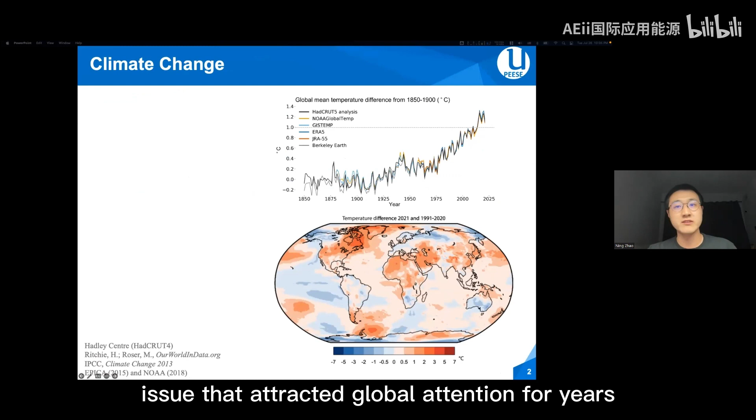Climate change has become a critical issue that attracted global attention for years. In fact, the past decade was the hottest on record, and this is the latest sign of global warming on the planet. Globally, 2021 ranks the 5th on the list of hottest years on record, warmer than 2015 and 2018. And the annual average temperature rise of 2021 set at 1.1 to 1.2 degrees C above the pre-industrial levels of the 20th century.

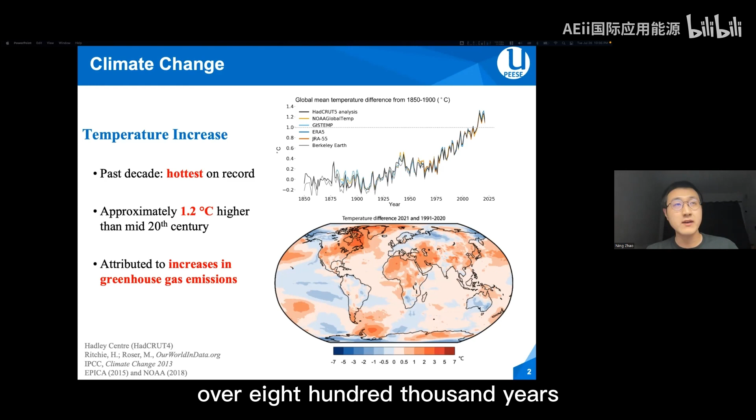And this is caused in large part by emissions of carbon dioxide and other heat-trapping gases from the burning of fossil fuel. And the CO2 concentration in the atmosphere is currently at the highest levels for over 800,000 years. So the global energy-related carbon dioxide emission increased from 2 gigaton per year in 1900 to 36.3 gigaton per year in 2021, which is the highest level for annual greenhouse gas emissions.

To enforce the global response to the threat of climate change, the United Nations has reached the Paris Agreement. It aims to keep a temperature rise in this century below 2 degrees C above pre-industrial levels, and to pursue efforts to limit the temperature increase even further to 1.5 degrees C. However, given that temperature in 2020 was already 1.2 degrees C higher than pre-industrial levels, one can say that this world is far from meeting these targets.

In this figure, we can further look at the challenges in front of us from a prediction perspective. The potential greenhouse gas emissions and the predicted temperature rise under uncertainty are presented for this century. A key feature in this figure is that the uncertainty can considerably influence both the greenhouse gas emissions and the temperature rises. So it is important to consider the uncertainties while planning for the future.

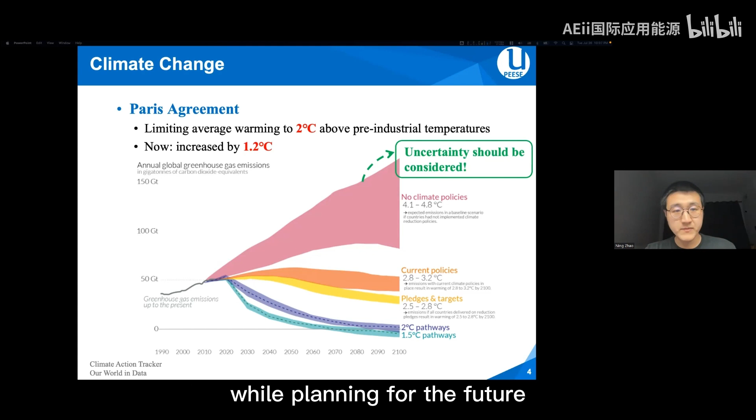In terms of the different cases, we can find that with no climate policies, the emissions are likely to skyrocket to over 100 gigatons by the end of this century, and the temperature could rise by 4 to 5 degrees C. On the other hand, involving some climate policy could lead to a temperature rise of 2 to 3 degrees C, and lower levels of emission compared to current status. If the world aims at achieving the 2 degree C long-term temperature target within the 21st century, zero emissions or complete decarbonization seems to be a promising and inevitable approach.

Therefore, effective and bold action is needed if the world intends to achieve these targets proposed by the Paris Agreement. The decarbonization policies from administrations are especially needed. To this end, New York State has the ambition to combat climate change. It has passed a sweeping climate plan in July 2019. It's called the Climate Leadership and Community Protection Act.

So several ambitious and major targets of the CLCPA include producing 70% of electricity from renewable sources by 2030, reducing 100% of the electricity sector's greenhouse gas emission by 2040, and eventually achieving net zero emissions in all sectors of the economy by 2050, which is 30 years from now. President Biden also announced ambitious climate targets for the power sector, such as achieving an emission-free power sector by 2035, installing millions of new solar panels and tens of thousands of wind turbines, etc.

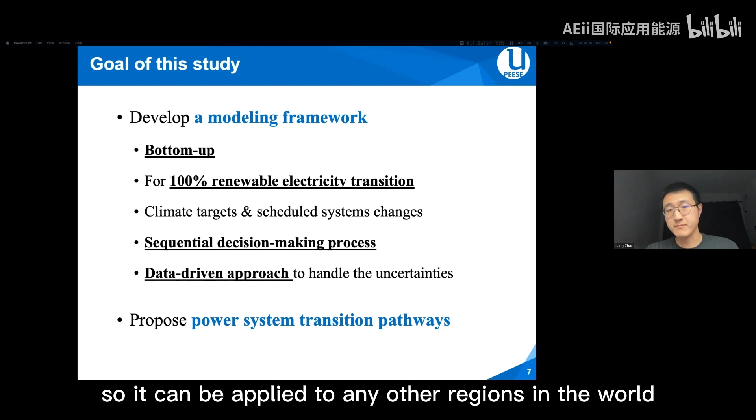There are two main goals of this study. The first is to develop a bottom-up modeling framework for 100% renewable electricity transition that accommodates climate targets, scheduled system changes, as well as the sequential decision-making process. The framework should be capable of integrating machine learning-based data-driven approaches to handle the system's uncertainties. And the framework should also be general enough so it can be applied to any other regions in the world.

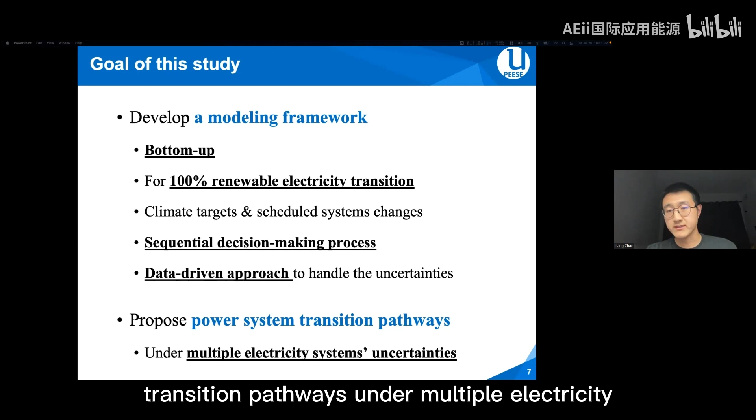The second goal is to propose the potential power systems renewable transition pathways under multiple electricity systems uncertainties. And the network framework figure here represents the power systems for this study. It shows electricity flows and emissions of the power sector. The system is supposed to meet the electricity generation demands on an annual basis.

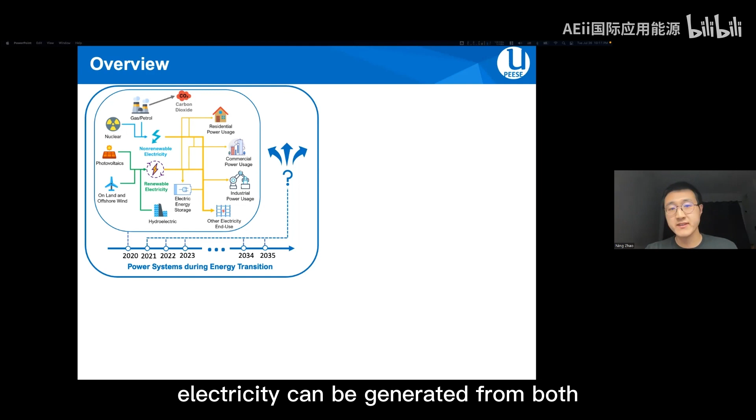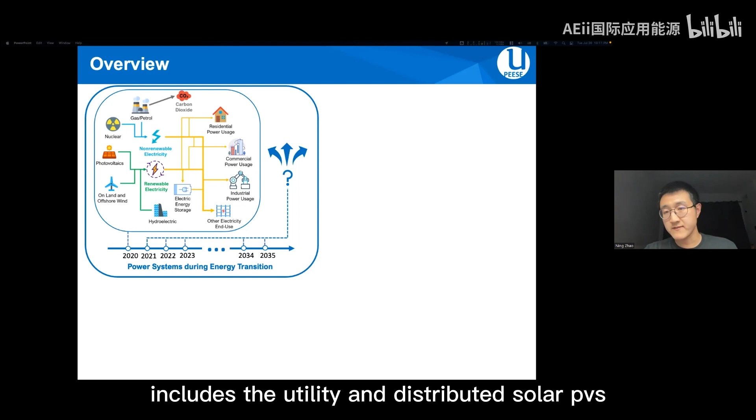In terms of power generation, electricity can be generated from both renewable and non-renewable technologies. Renewable sources include hydro, solar, and wind, and solar power includes the utility and distributed solar PVs. Wind power can be categorized into on-land and offshore wind. Non-renewable energy sources include fossil and nuclear.

So the power systems model is formulated in a bottom-up manner that characterizes each power generation facility by its generation technology and its age. And this can be more appropriate for integrating the energy transition process, which is directly related to the active technologies and facilities.

The electricity is produced and transmitted to be used for multiple end uses, including residential, commercial, industrial, and other power end uses. A proportion of electricity may be stored before its usage. This is necessary for the stability of the grid, since a lot of electricity would be generated from intermittent sources such as wind and solar.

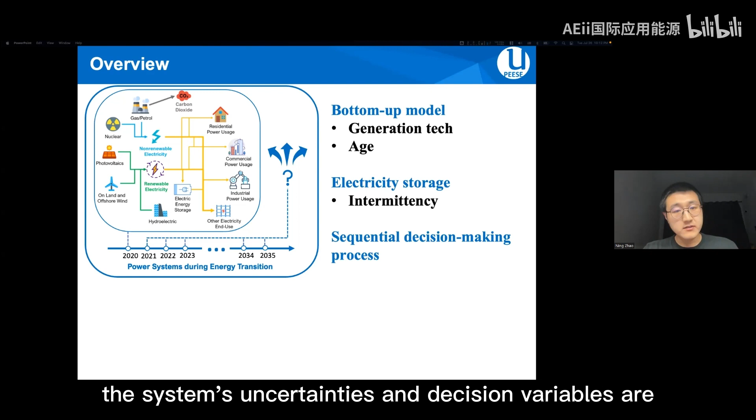The system's uncertainties and decision variables are realized and determined on an annual basis, which reflects the sequential decision-making process. The figure on the bottom left shows the uncertainty data samples in one time period, considering that we have 15 time periods across the planning horizon. The power systems uncertainties in this study include the electricity generation demand, the market availability of wind turbines, and the market availability of solar PVs.

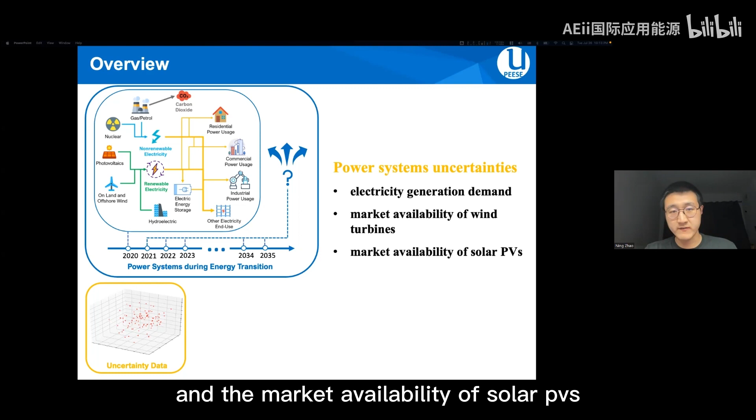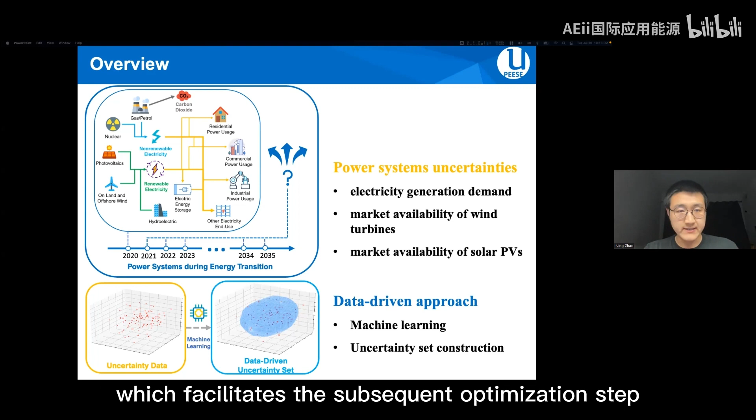Based on the uncertainty data, machine learning techniques are used to construct the data-driven uncertainty sets, which facilitates the subsequent optimization step. The machine learning techniques applied in this study include a variational inference algorithm for Dirichlet process mixture model, DPMM, principal component analysis, and kernel density estimation.

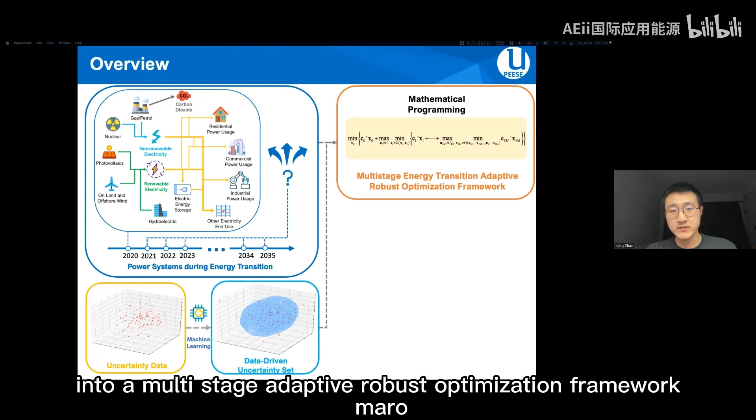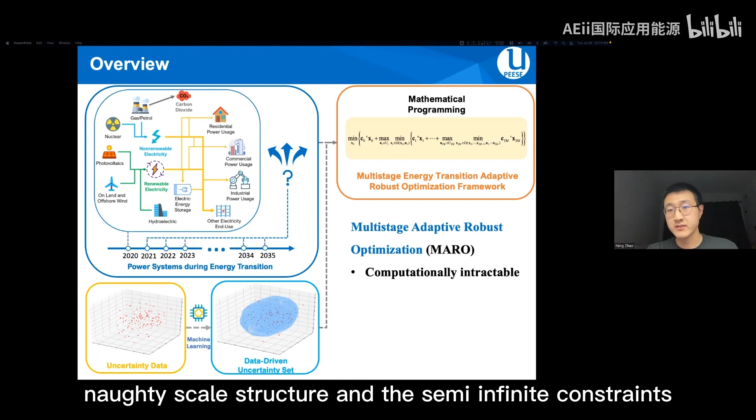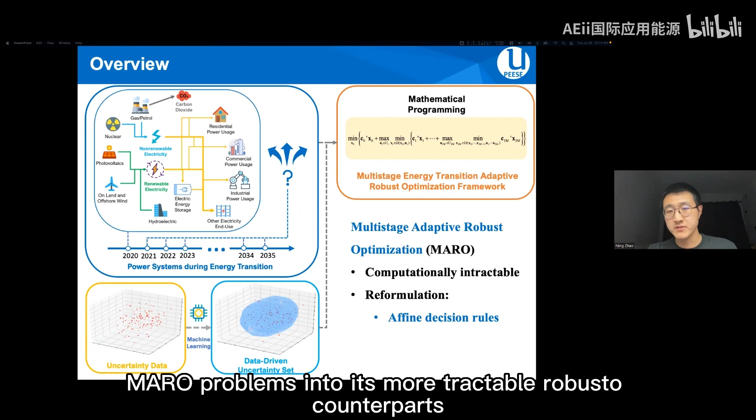Given the power systems formulation and the uncertainty set structure, the renewable power systems transition under uncertainty can be formulated into a multi-stage adaptive robust optimization framework, MARO. Note that the MARO problems are computationally intractable because of their multi-stage structure and the semi-infinite constraints. Therefore, affine decision rules are applied to reformulate the MARO problems into their more tractable robust counterparts.

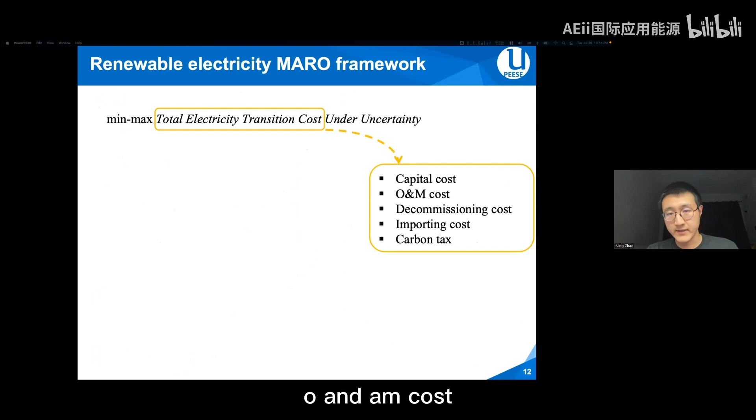After computational optimization, we could have the potential renewable electricity transition pathways under uncertainty, such as annual electricity generation from different energy sources and technologies. This is the structure of the MARO power systems renewable transition framework proposed in this study. The objective function is to minimize the total electricity transition cost under uncertainty. The total electricity transition cost consists of capital cost, O&M cost, decommissioning cost, importing cost, and also carbon tax.

The uncertainties, as mentioned previously, include the electricity generation demand, the market availability of wind turbines, and market availability of solar PVs. The min-max here in the objective function is a simplification of the original multi-level optimization structure. And here we can find X and U represent the decision variables and the uncertainties in each time period respectively.

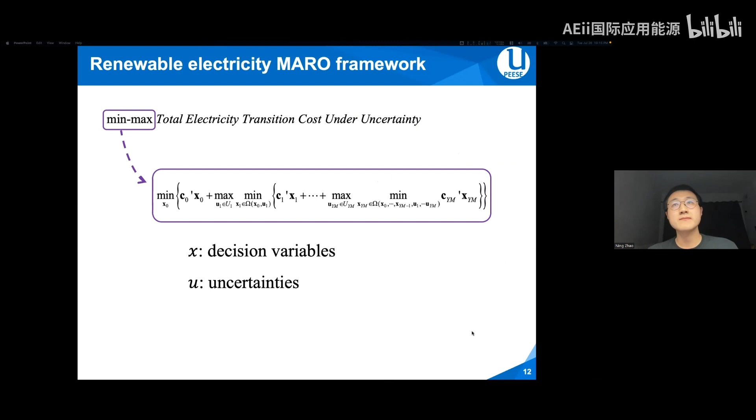The objective function is subject to multiple types of constraints. For instance, the renewable electricity generation and emission targets constraints represent the technological and climate targets, including net zero emission targets, renewable electricity percentage target, carbon-free electricity targets, emissions target, and also renewable generation technology deployment targets for intermittent renewable sources and also energy storage.

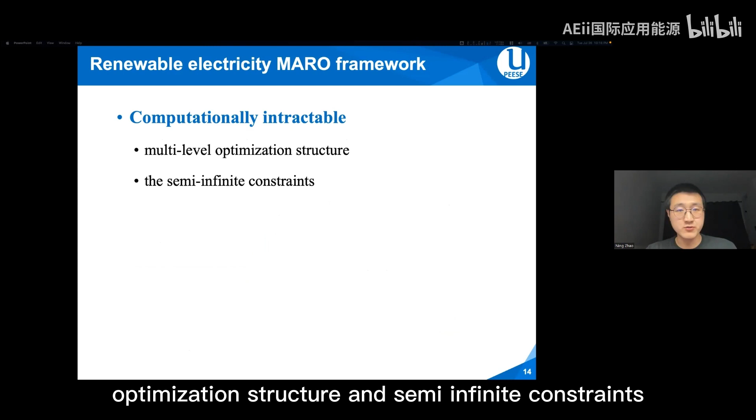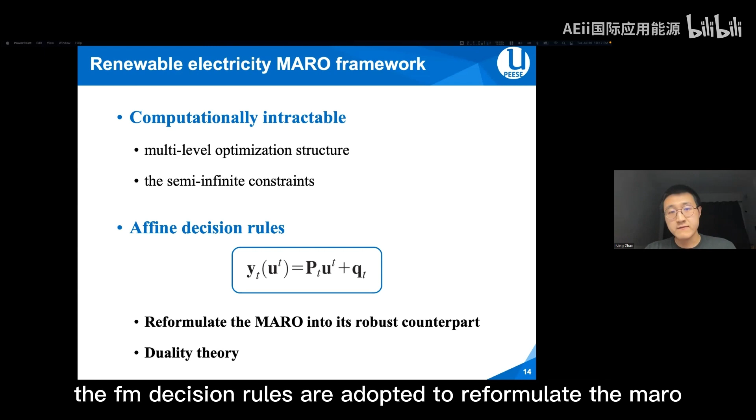The proposed renewable electricity transition MARO is computationally intractable owing to its multi-level optimization structure and semi-infinite constraints. And semi-infinite here means that we have a finite number of variables and an infinite number of constraints because of the constraints defined by the uncertainty sets. Therefore, the affine decision rules are adopted to reformulate the MARO into its tractable robust counterpart based on duality theory.

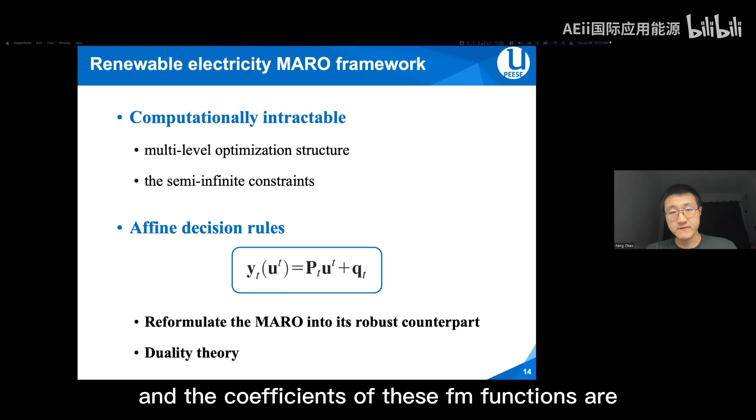Specifically, the affine decision rule replaces the wait-and-see decision variables by the affine functions of these uncertainty realizations. And the coefficients of these affine functions are introduced as new variables, as shown here.

To illustrate the applicability of the proposed electricity transition framework, a case study on the 100% renewable power systems transition of New York State under uncertainty is investigated. The main climate targets include the 70% renewable electricity generation by 2030 proposed by the New York State CLCPA, and achieving an emission-free power sector by 2035, according to the National Climate Plan of President Biden. And the technology deployment targets for renewable generation and electricity storage are also included.

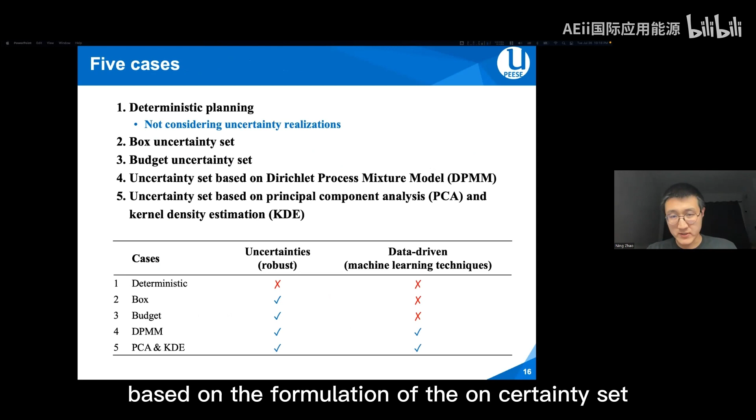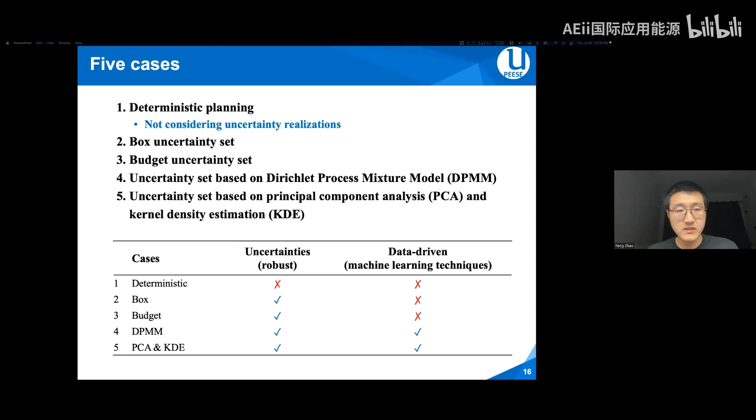5 cases are investigated based on the formulation of the uncertainty set, including deterministic planning, box uncertainty set, budget uncertainty set, data-driven uncertainty sets using variational inference algorithm for DPMM, and data-driven uncertainty sets formulated using PCA coupled with KDE. Specifically, the deterministic planning case includes no uncertainties, so its optimization results are not robust and cannot fully hedge against the worst cases during the power system's renewable transition.

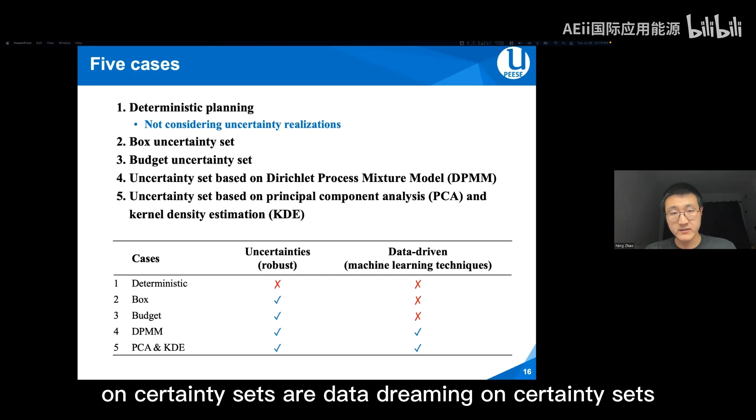And the table here shows the features of different cases in this study. The deterministic planning considers no uncertainties, and only the DPMM and PCA coupled with KDE uncertainty sets are data-driven uncertainty sets that are constructed using these machine learning techniques.

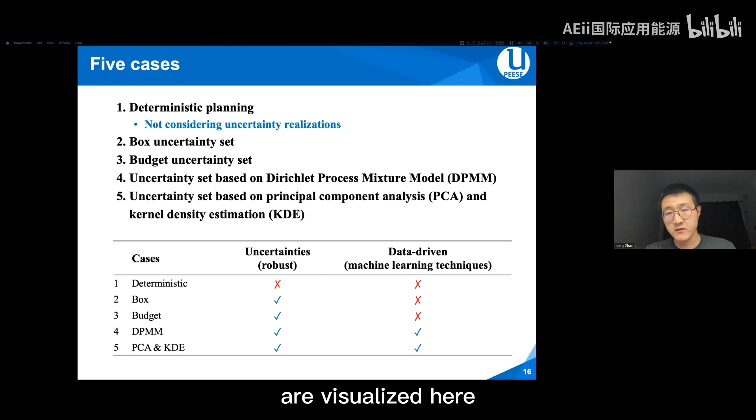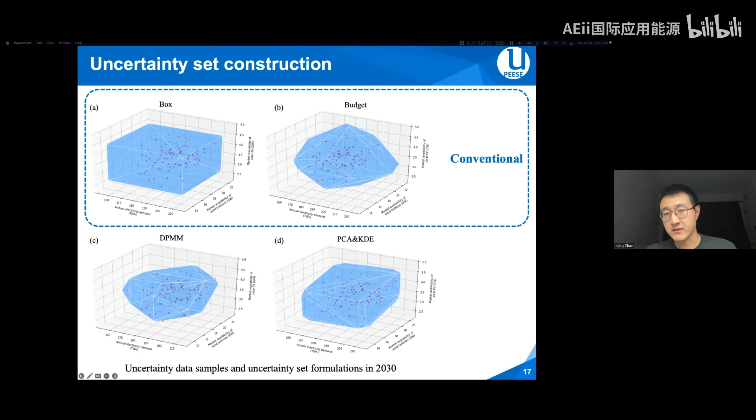4 types of uncertainty sets for the year of 2030 are visualized here. In this figure, the x-axis, y-axis, and z-axis represent the uncertainties of annual electricity demand, market availability of wind turbines, and market availability of solar PVs, respectively. The box uncertainty set and budget uncertainty set for 2030 are shown in the top 2 figures. Both types of uncertainty sets are not data-driven uncertainty sets, and all data samples are included in the box or budget uncertainty sets.

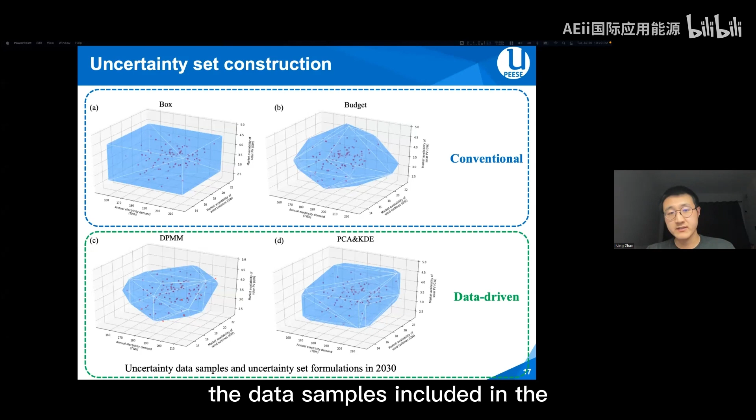On the other hand, the bottom 2 figures visualize the DPMM uncertainty set and the uncertainty set using PCA coupled with KDE for 2030. These data-driven uncertainty sets are tuned to have the same coverage level of data samples, which is 90% in this study. In this figure, the data samples included in these data-driven uncertainty sets are plotted using red dots, while the samples that are not included are represented by the red crosses.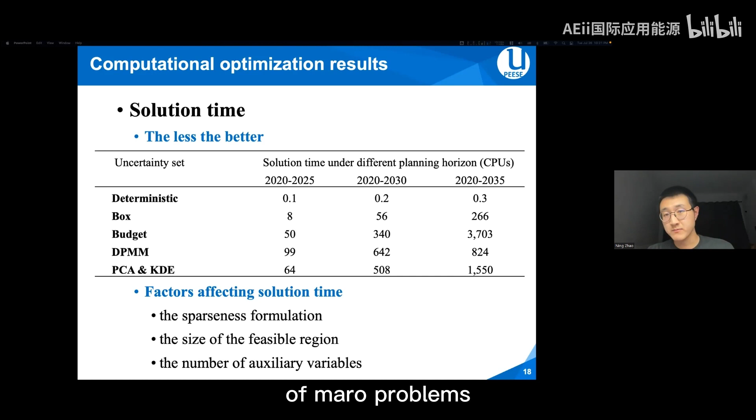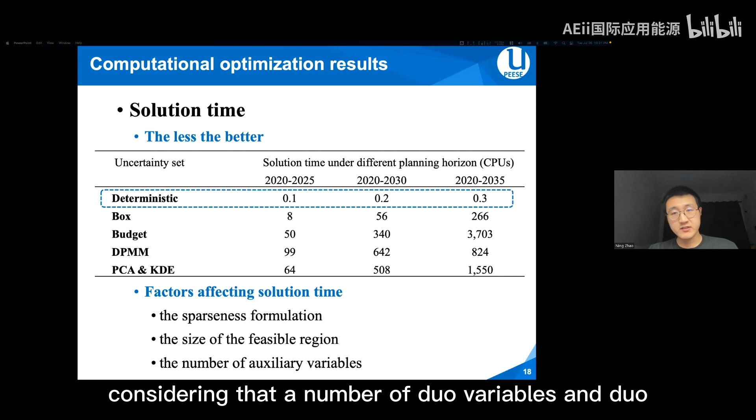Note that several factors can affect the solution time of MARO problems, including the sparseness, formulation, the size of the feasible region, and also the number of auxiliary variables. The deterministic case has the shortest solution time of less than 1 CPU second for all planning horizons, while the robust optimization cases tend to have much longer solution time. This is because the optimization problem for deterministic planning has significantly smaller problem sizes than the robust optimization cases, considering that a number of dual variables and dual problem constraints are introduced while we implement the affine decision rules for MARO.

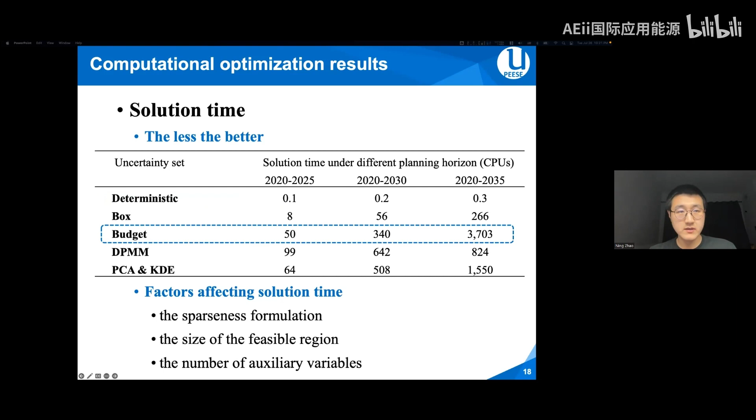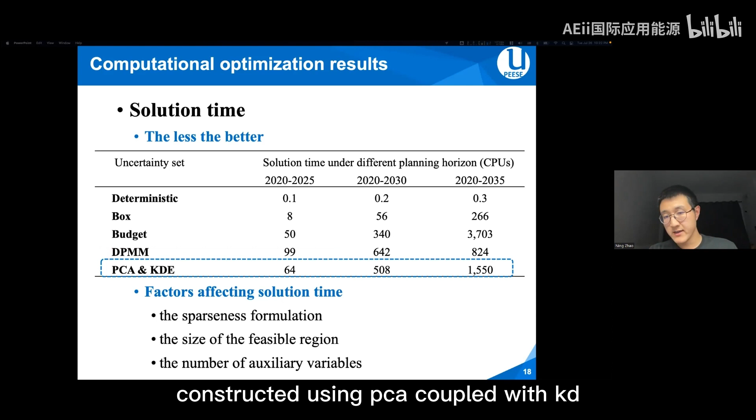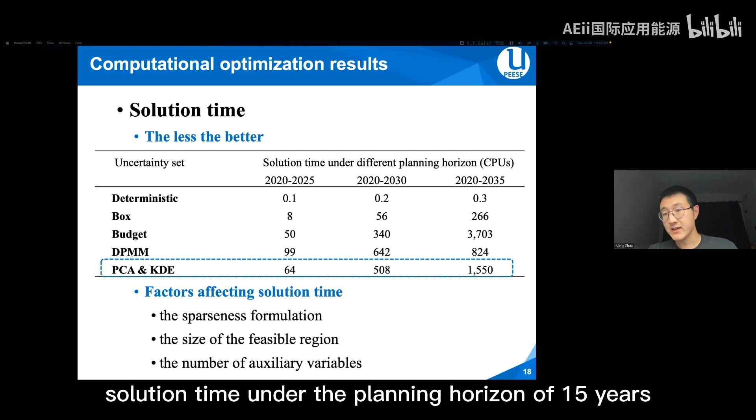Lastly, the uncertainty set constructed using PCA coupled with KDE has more auxiliary variables that may increase the solution time for even shorter planning horizons. But its sparse formulation and the relatively small uncertainty set feasible region combine to lead to less solution time under the planning horizon of 15 years compared to the budget uncertainty sets.

The optimal objective values, namely the minimum renewable electricity transition cost under uncertainty for different uncertainty sets and different planning horizons, are shown here. The deterministic planning solutions show lower electricity transition costs compared to the robust optimization results because the potential uncertainty realizations are not considered in these deterministic cases. The total system costs for the electricity transition of robust optimization solutions are 21 to 42% higher than the deterministic planning.

Considering the robust optimization cases, using data-driven uncertainty sets, including PCA coupled with KDE and DPMM, could achieve less conservative solutions compared to the conventional budget and box uncertainty sets, as shown by their relatively lower objective value. The total renewable transition cost under these data-driven uncertainty sets is 2 to 17% lower than the conventional uncertainty sets.

In addition, the data-driven MARO solution could cover 90% of the potential uncertainty realization across the planning horizon, while the solution under the deterministic scenario could only cover around 24 to 57% of the potential uncertainty realization during the transition process. Therefore, using robust optimization could effectively address energy transition uncertainties and benefit the reliability of power systems.

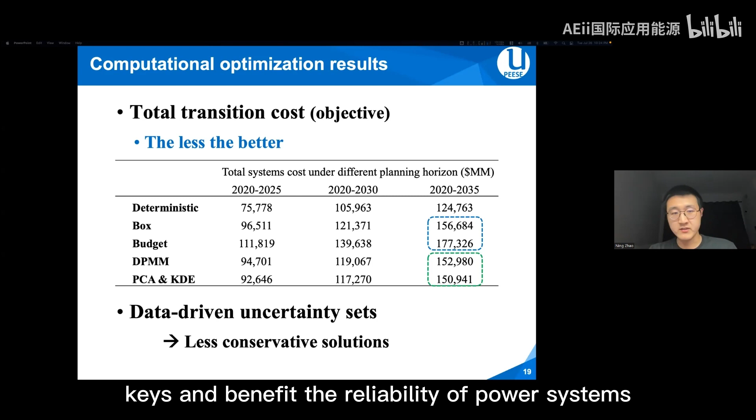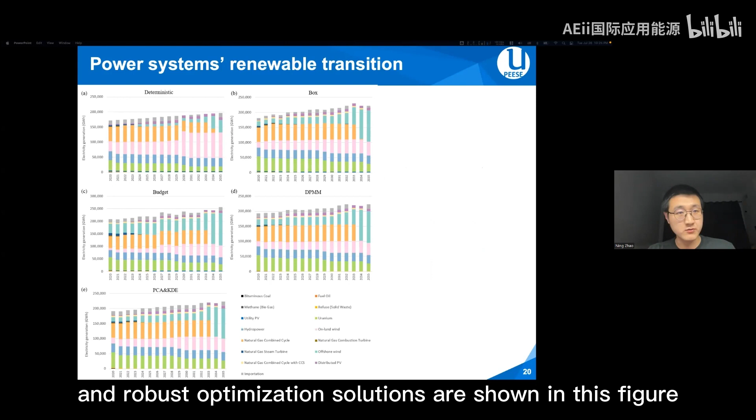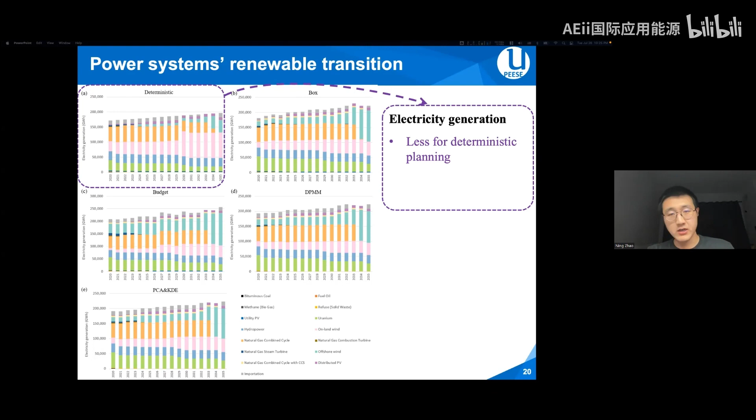The electricity generation from different sources during the transition under deterministic and robust optimization solutions are shown in this figure. We can find that the electricity generation for the deterministic solution in the first figure is much lower compared to the robust optimization solutions shown in the other four figures. This is because the case under uncertainty could compensate for any potential realization of the uncertain electricity generation demands, which could be higher than the generation demands under the deterministic case for any time periods within the planning horizon.

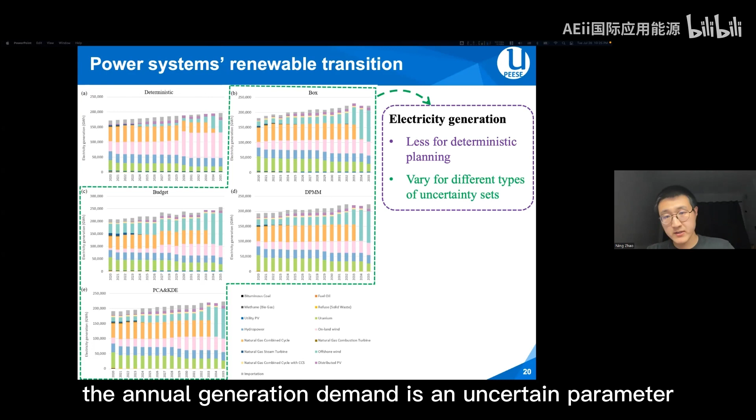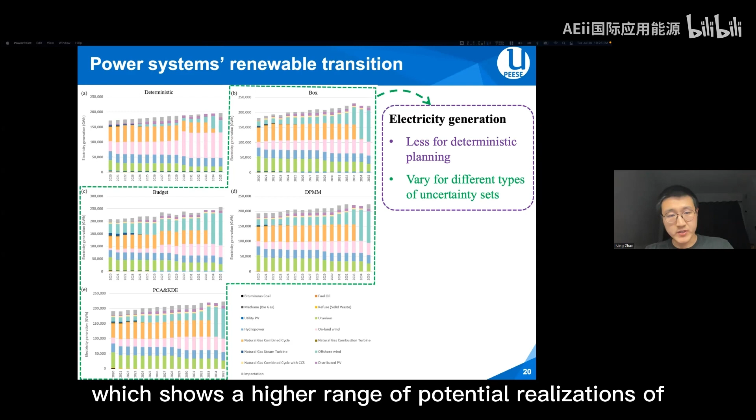Notably, the annual electricity generation within the planning horizon may vary for different types of uncertainty sets. This is because the annual generation demand is an uncertain parameter, and the ranges of its potential realization are likely to be different for different types of uncertainty sets. The electricity generation under the budget uncertainty sets tends to be much higher compared to other types of uncertainty sets. And this can be illustrated by the previous figure on the uncertainty set visualization, which shows a higher range of potential realizations of the uncertain electricity generation of the budget uncertainty sets.

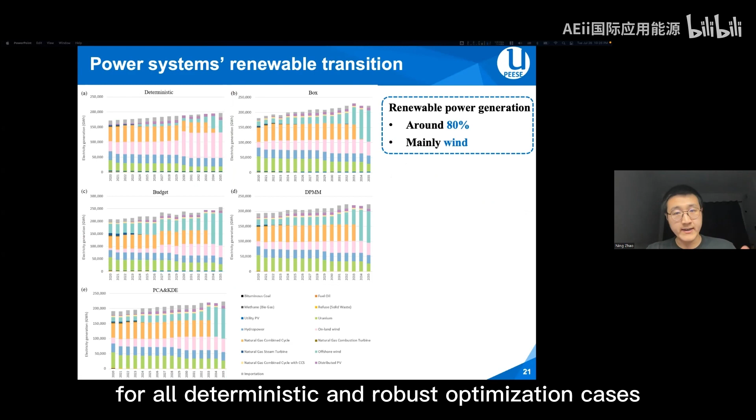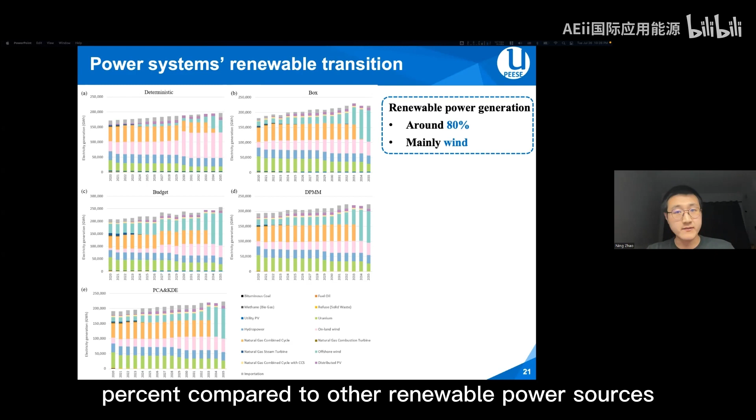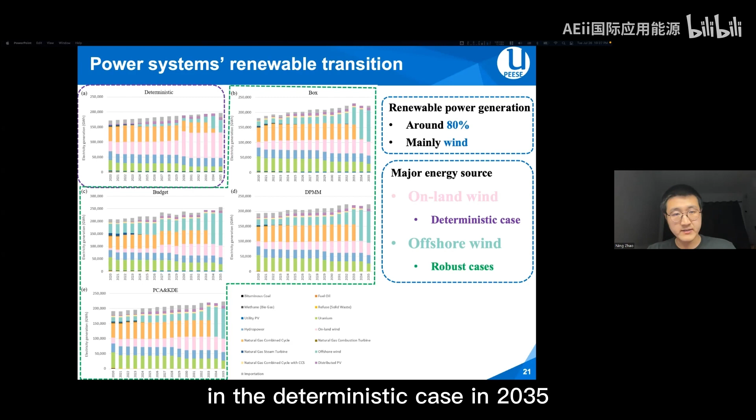In terms of renewable energy generation, renewable sources provide around 80% of total electricity generation by the end of the planning horizon, that is 2035, for all deterministic and robust optimization cases. And wind may become the major source of electricity, mainly due to the relatively high capacity factor of over 20% compared to other renewable power sources. Notably, the major energy source for power systems under deterministic and robust optimization cases are different. On-land wind may become a major source for electricity generation in the deterministic case in 2035, while offshore wind accounts for the largest proportion of electricity generation by the end of the planning horizon under the cases with uncertainty.

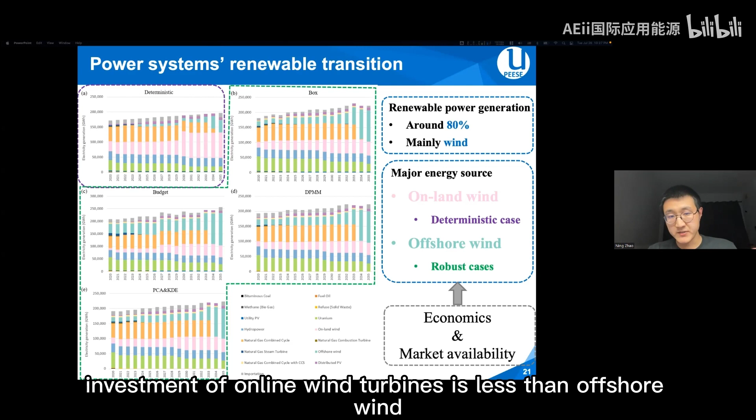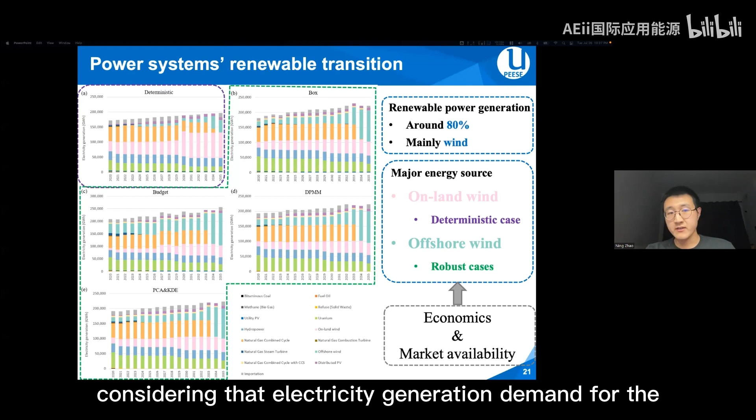The differences in the application of different types of wind energy for deterministic and robust optimization cases result from both economic and market availability reasons. Economically, the capital investment of on-land wind turbines is less than offshore wind, but on-land wind turbines would need more investment in electricity storage units for a unit amount of electricity generation. Therefore, considering that electricity generation demand for the robust optimization cases is much higher than the deterministic ones, the cost for electricity storage would significantly increase if on-land wind becomes the major renewable source in these robust optimization cases.

In terms of market availability, the offshore wind turbines have high capacity factors, so they would generate more electricity per unit amount of installed capacity compared to on-land wind. And this is particularly important considering that the market availability of wind turbines in these robust cases could be considerably less than the deterministic case, since it's an uncertain parameter. And due to these two reasons, on-land wind is selected as the main power source at the end of the planning horizon in the deterministic case, considering that this case has complete information about the annual generation demand and the much larger market availability for wind turbines.

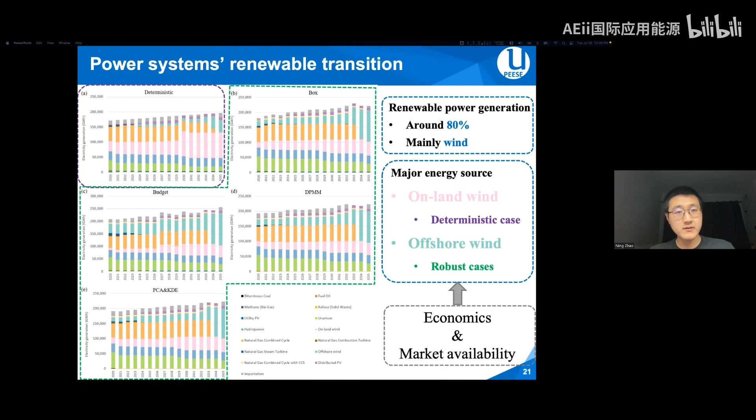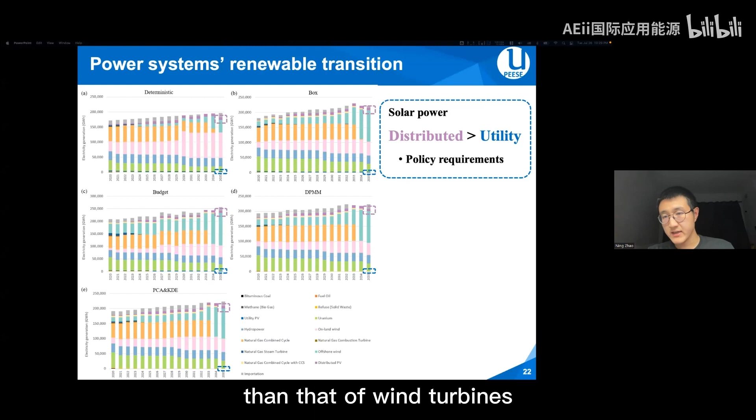As for solar, distributed solar PVs account for a large percentage of electricity generation by 2035 for all deterministic and robust optimization solutions, while utility solar PV has a much smaller market share compared to distributed solar PV under all these cases. The relatively high penetration level of distributed solar PV is probably because of the deployment requirements from the government. This requirement mandates the capacity of distributed solar PV to be higher than 6 gigawatts by 2025, and no such requirements exist for utility solar PV in New York State. On the other hand, the market availability of solar PV is much less than that of wind turbines, which suggests that it may benefit the application of solar power to increase the market availability of solar PVs through increasing importation or domestic manufacturing.

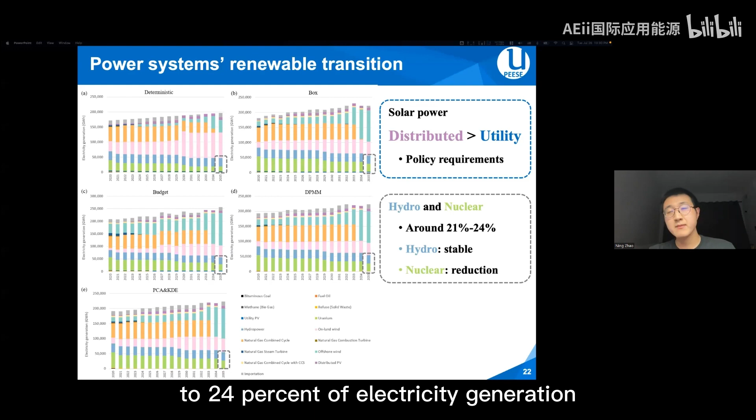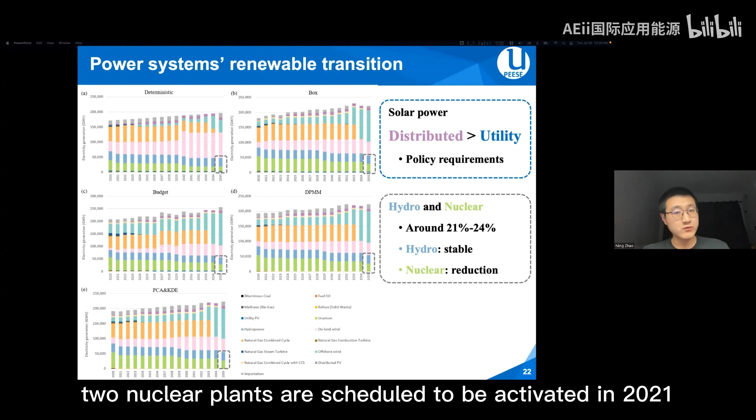Hydro and nuclear power currently provide over half of the annual power generation in the state, and they would account for around 21 to 24% of electricity generation by 2035 for all cases. The generation from hydropower is relatively stable during the transition because of its long lifetime, and the major reduction from nuclear power for all deterministic and robust optimization solutions is because of the scheduled decommissioning of large nuclear plants, and also its relatively short lifetime. For example, 2 nuclear plants are scheduled to be deactivated in 2021, and the scheduled decommissioning can be observed in this figure for all solutions.

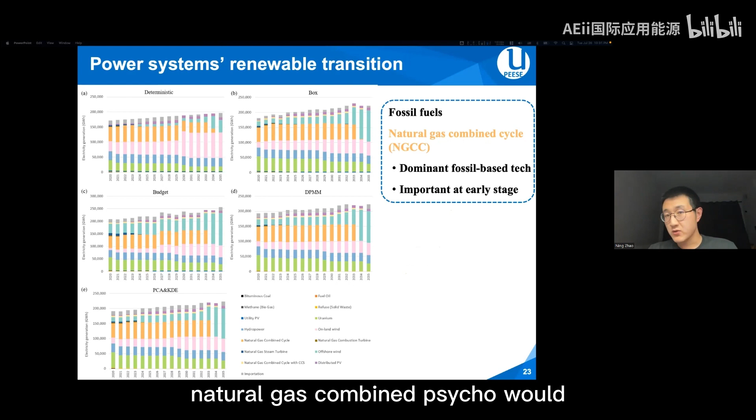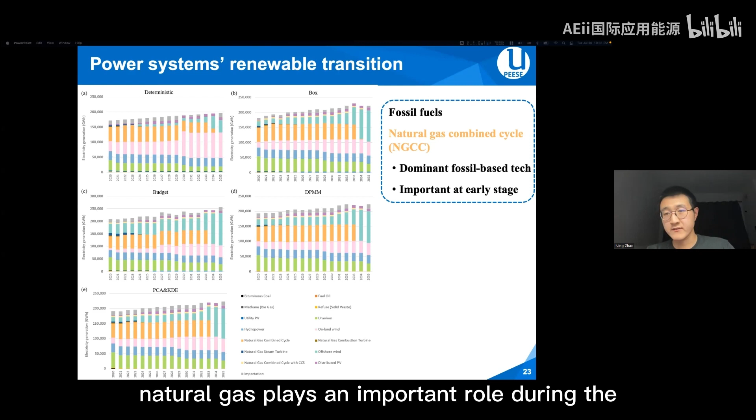In terms of fossil-based electricity, natural gas combined cycle would continue to be the dominant technology in the first decade of the electricity transition process for all of these cases. It is worth noting that the electricity generation from NGCC increased slightly during the first 4 years of the planning horizon for both cases with or without uncertainty involved, indicating that natural gas plays an important role during the early stages of power systems decarbonization. The electricity generated from natural gas under the deterministic case would gradually decrease from the 5th year of the planning horizon and go extinct exactly by 2035. On the other hand, the generation from natural gas would mainly be replaced by offshore wind 1 year before the end of the planning horizon for all solutions with uncertainty.

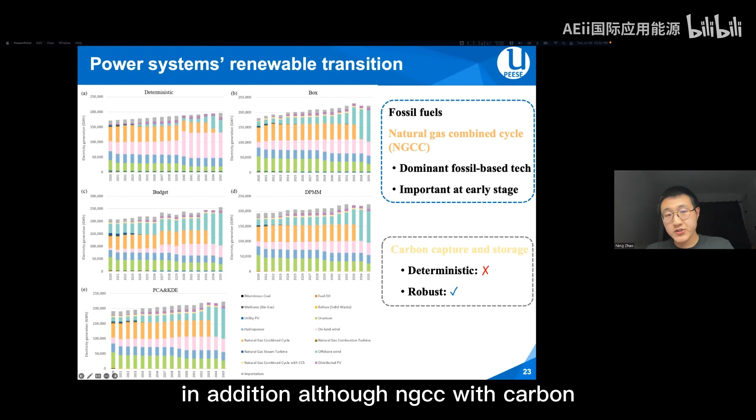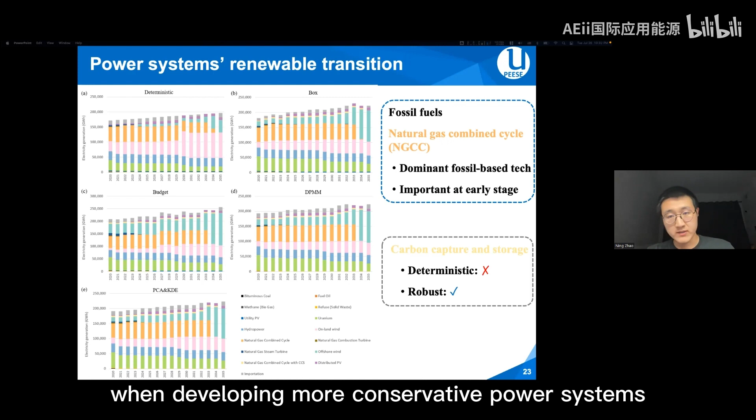In addition, although NGCC with carbon capture and storage is not selected for the deterministic solution, this technology may contribute to the electricity generation for robust optimization cases with all types of uncertainty sets. This suggests that CCS may benefit natural gas-based generation technologies when developing more conservative power systems renewable transition plans.

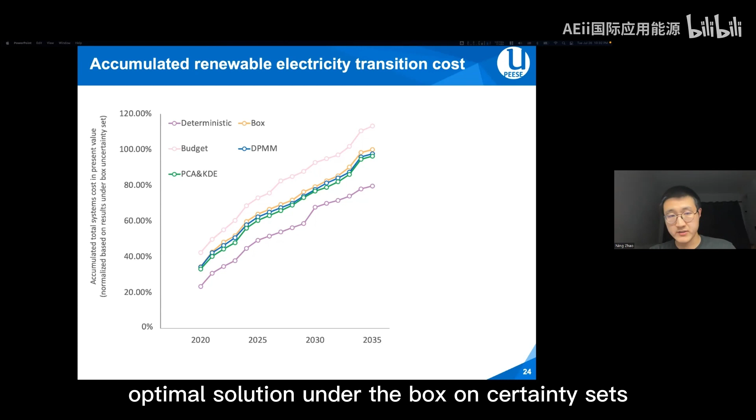The accumulated total transition cost through the renewable electricity transition process for all scenarios are shown in this figure, and the accumulated total cost are normalized based on the optimal solution under the box uncertainty set. The cost for budget uncertainty sets are considerably higher than those of the deterministic solution and the robust optimization cases with other types of uncertainty sets for all stages within the planning horizon.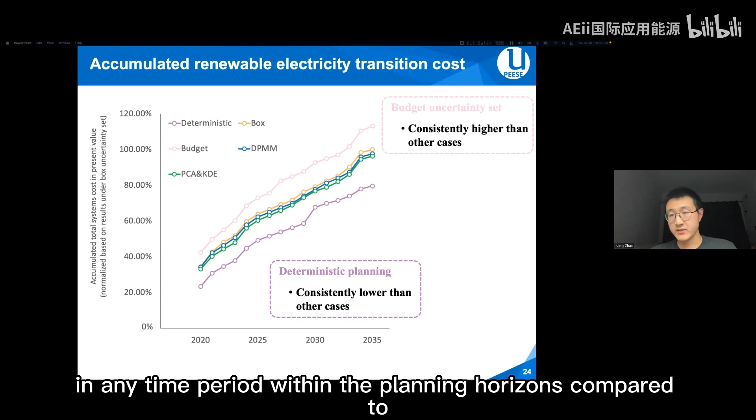On the other hand, the deterministic case shows much lower accumulated total cost in any time period within the planning horizon compared to the cost for all robust optimization cases. This is because the deterministic solution would not accommodate the potential realization of these systems uncertainties.

Moreover, the data-driven uncertainty sets, including the DPMM and PCA coupled with the KDE-based uncertainty sets, show consistently lower total accumulated transition cost during the planning horizon than conventional uncertainty sets, such as box and budget uncertainty sets. This indicates that the data-driven uncertainty sets could lead to less conservative electricity transition pathways for any stage within the planning horizon, while also effectively handling the power systems uncertainties.

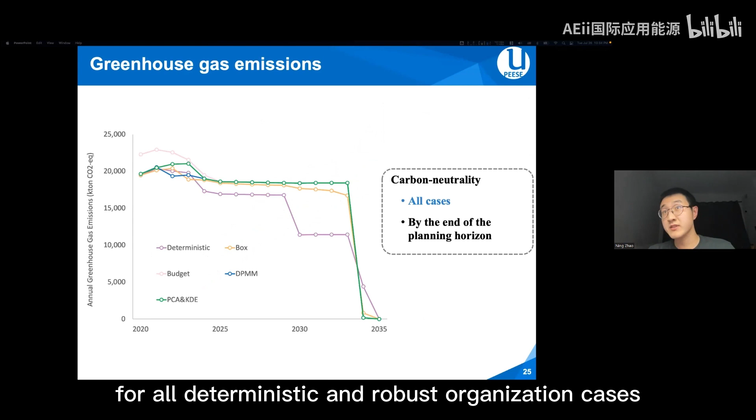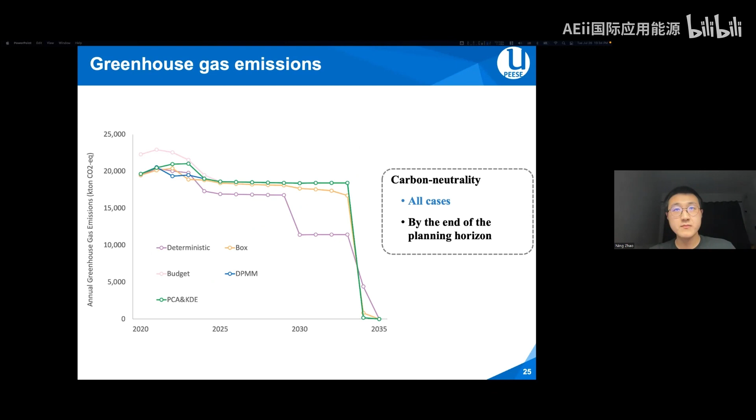This figure presents the annual total greenhouse gas emissions in CO2 equivalent across the planning horizon. The emissions at the end of the planning horizon become 0 for all deterministic and robust optimization cases, indicating the achievement of carbon neutral electricity systems. The emissions in the deterministic case are over 10% lower than the cases under uncertainty. This is because of the relatively low annual electricity demand for the deterministic case, because deterministic planning does not need to address potential uncertainty realizations of annual electricity demand.

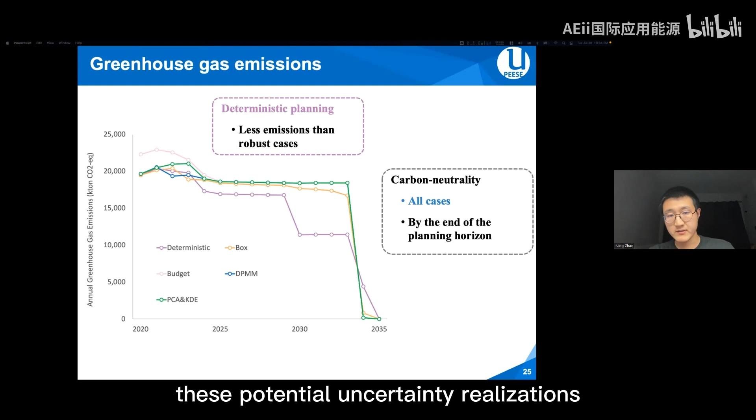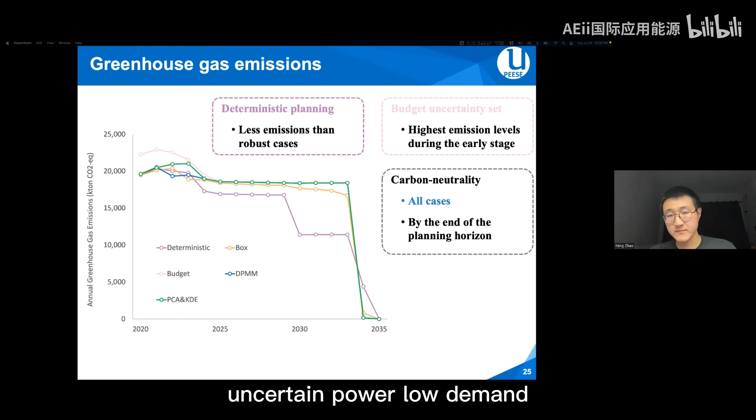The case under the budget uncertainty sets has more greenhouse gas emissions at the early stage of the transition, and this is mainly due to its large feasible regions of the uncertain power load demand compared to other types of uncertainty sets. The potentially large generation demand requires more fossil-based electricity to compensate, considering that fossil-based power would be more economically favorable, especially during the early stages of the energy transition.

Furthermore, the large reduction of greenhouse gas emissions in the last 3 years is mainly attributed to the large market availability of variable renewable generation units, which is represented by their production amounts in the US. If smaller or more accurate market availability estimations are available, we can expect this reduction of greenhouse gas emissions to be steadier.

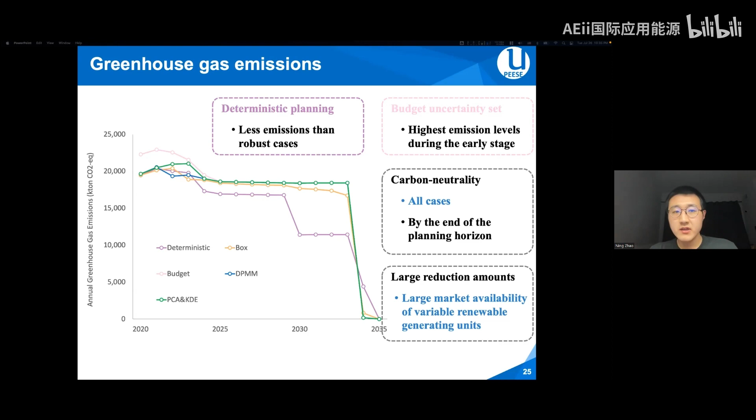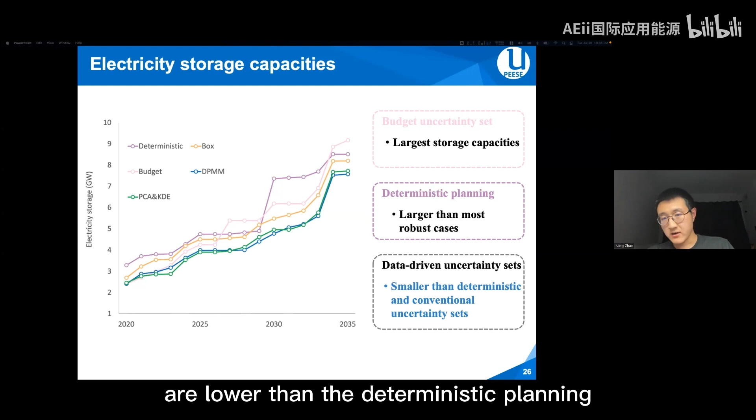Specifically, onshore wind turbines tend to have relatively low capacity factors compared to offshore wind, so larger electricity storage capacities are needed per unit of electricity generation from onshore wind turbines than offshore wind turbines. Furthermore, the electricity storage capacities under the data-driven uncertainty sets are lower than the deterministic planning and the robust cases under conventional uncertainty sets, mainly because the cases using data-driven approaches have relatively low generation capacity from variable renewable energy of solar and wind.

And here we list the major conclusions of this work.